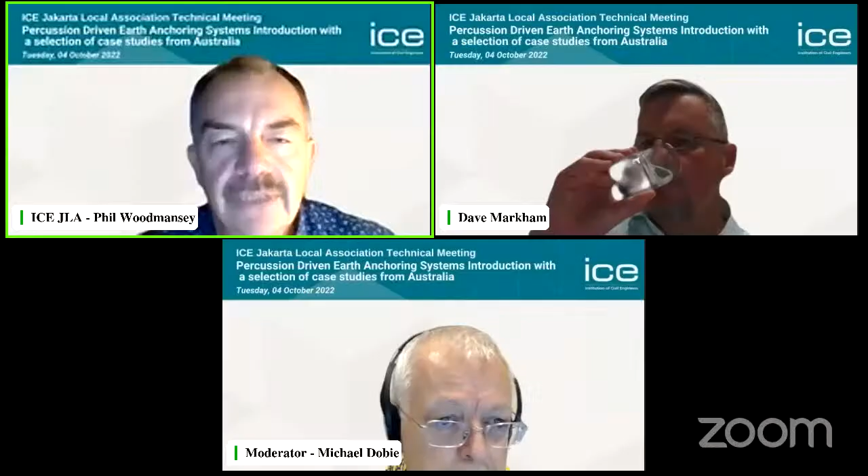Okay, thanks, Malvin. Apologies everyone if you can hear the sirens. I am right in the middle of the city and there's something going on outside, but I hope you can hear me okay. Welcome everyone to our ICE Jakarta Local Association technical presentation. For those of you who know, we try to run good quality presentations once a month or thereabouts. Normally we're live at our home location at the Eastern Promise in Kemang, but tonight we're completely remote again because our speaker, Dave Markham, is based in Australia, where it's getting quite late there.

And so thank you, Dave, for taking the time to talk to us. I think on that note, I'll allow Mike to introduce you and look forward to listening to your presentation.

Hey, thanks very much, Phil. So I have the pleasure this evening of introducing our speaker and the topic which he's going to speak about. So Dave Markham is a civil engineer who started his career in the UK, but he moved out in this direction, I think, quite a few years ago, and lives in Australia these days. And he's worked in a number of areas there.

But I first met Dave when he was working with a geosynthetics company associated with the work that we do there. And in fact, it's quite nice to actually welcome Dave back to Indonesia this evening, but unfortunately in only a virtual way, Dave. It's a shame you're not actually here in the Eastern Promise pub, but never mind.

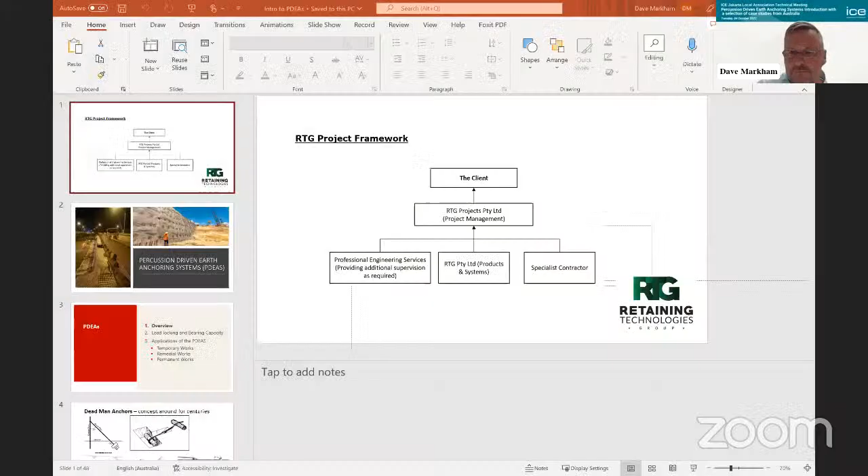So I'm just going to share my screen now, hopefully. Yep, it's coming through nicely, Dave.

Fantastic. Okay, just a very brief introduction to the company that I work for and run here in Australia. It's quite a young company called Retaining Technologies Group, and it delivers turnkey type solutions, or total solutions. What that does is bring together all the engineering, the products and systems needed to solve embankment stability and retaining wall problems, and also the installation. Equally important is the supervision and management of these projects, to make sure they're built to a high quality, built safely, and meet a client's budget expectations.

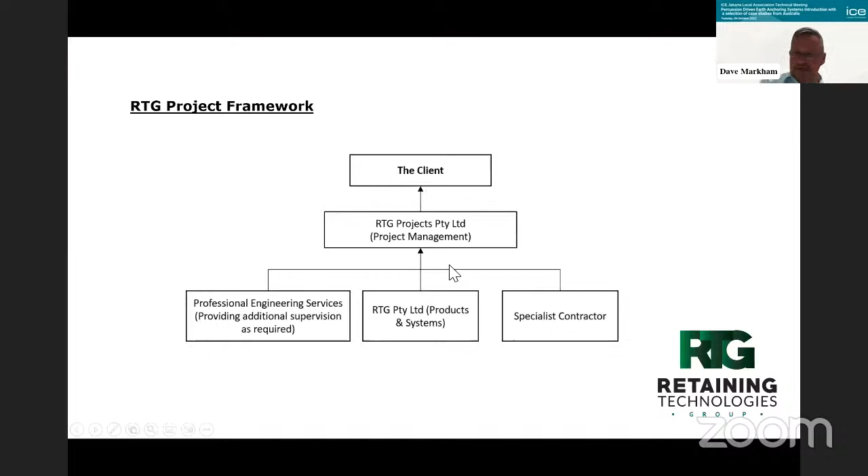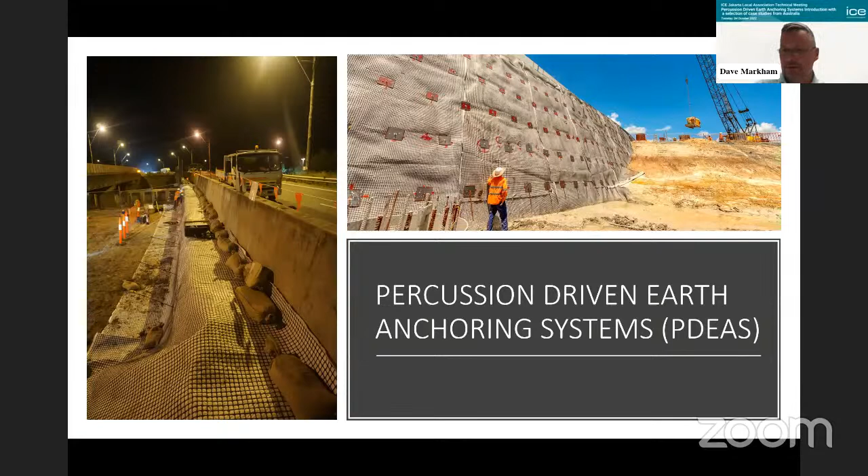So let's dive straight into the main topic of discussion tonight, which is the percussion-driven earth anchoring system. There are a couple of photos on this slide, both temporary works projects using this type of system. The one above the text is a relatively new project carried out at a place called Deception Bay in Queensland. It's a temporary works application - you can see it's a very steep slope, up to I think 9 meters in height. It's stabilizing that embankment using this anchor system to allow a new bridge abutment to be built in front of it.

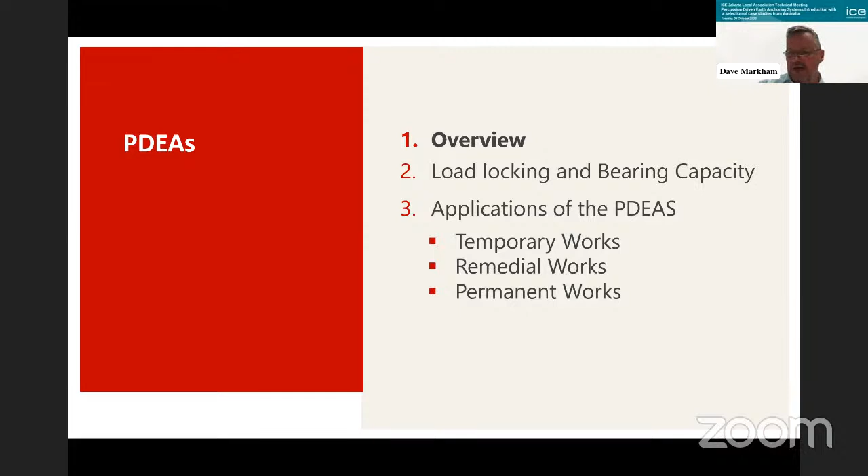Right, so I'm going to give you an overview of this system and where it's come from. I also want to talk about how the system functions, how it works from a load locking and bearing capacity application. Then we'll go on to talk about applications and where this system's being used in temporary works, remedial measure works, and finally permanent work solutions.

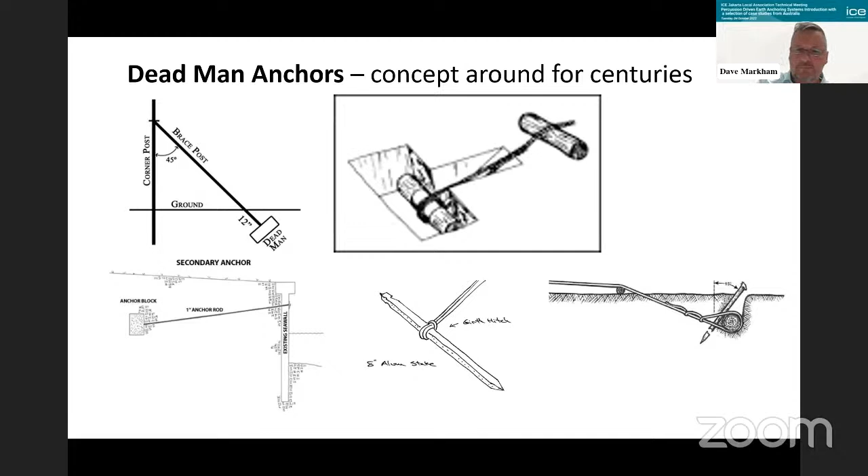So I'm referring to this as a percussion-driven earth anchor system. Sometimes it can be referred to as a mechanical deadman anchor system. Let's understand a little bit about what deadman anchors are - there's certainly nothing new, they've been around for centuries. Romans and the Egyptians used this concept of burying something in the soil to provide an anchor, to be able to put a tension force on it. Where the percussion-driven earth anchor system differs - and it's been around commercially probably 30, if not 40 years - is that you drive it into the soil, to whatever depth you need, then tension it such that the anchor flips in the soil and becomes a dead man.

Okay, so it's a percussion-driven earth anchor. I should mention that word 'earth', because it is very much an earth anchor solution - it's not a rock bolt. You've got to use this system in displaceable soils, material that you can actually displace. So it's not a rock anchor - this is not the right solution for hard sandstones or maybe granites. This is very much an earth anchor option.

As a system, it can be rapidly deployed and is corrosion resistant. Installing it, you can use traditional or conventional portable equipment, from the smallest equipment like a manual sledgehammer, knocking a drive rod in, to maybe a small jackhammer to put smaller anchors in, to the other end of the spectrum where you use a small excavator, typically 5 to 8 tons in capacity, with a mounted percussion breaker that drives the anchor into the soil.

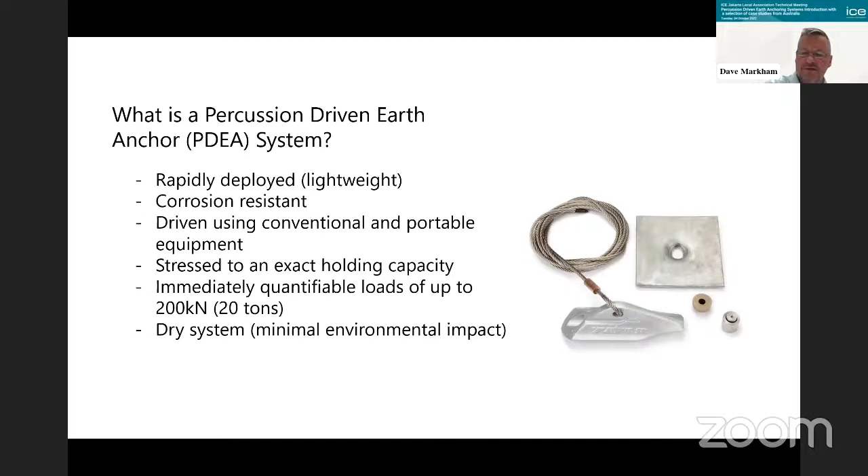So we refer to this solution as a system, and we've got to look at the whole thing as a system. When you're designing and detailing it, don't just think of the anchor head, think of all the other components. There's very much 5 components to the whole anchor system: you've got your head, then some sort of lower termination that connects the wire, tendon, or maybe a rigid rod to the anchor head, and then at the top here, your top accessory, your top termination, could be a load plate, could be a wedge grip, or maybe a nut of sorts. But always think of this as a system.

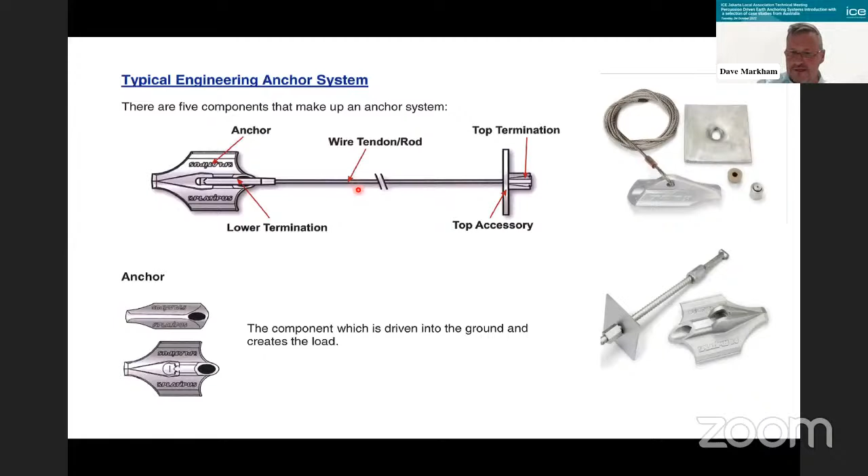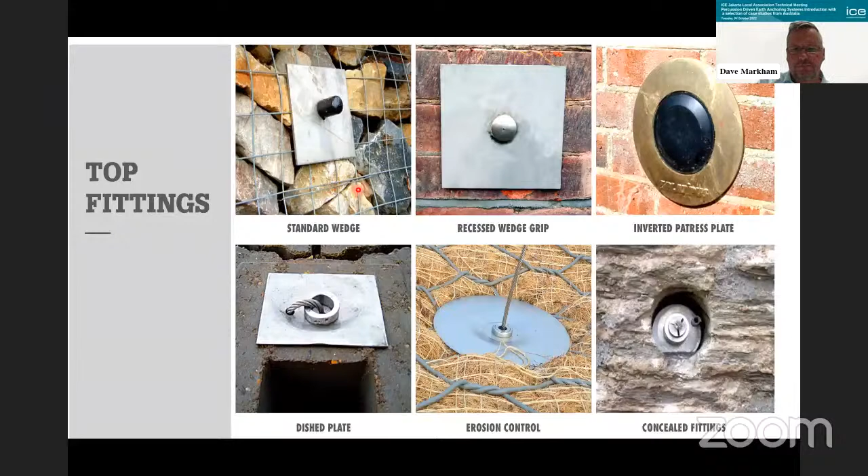These are just a few photos. I was quite fortunate just before COVID, a couple of years ago, to go to Switzerland and walk some sites with a contractor there that does an extensive amount of this type of solution using this type of system for embankment slope stability. The ground, if you've ever been to Switzerland, is very undulating, and the ground conditions are pretty ideal for using and deploying this type of system. But I picked up quite a lot of information on how they go about their business and their adopting of their type of solutions with it.

And I really quite liked, in this top left-hand corner here, the waling plate arrangement. This is very much for a temporary embankment here, but they come up with these channel sections, which I thought were quite clever to spread the load out over the slope. You can see the mesh in the face there and an erosion mat as well. Also they're very clever with their quality assurance - you can see those little tags on there. Actually, every anchor they install is numbered, and then they relate that back to a quality assurance program or sheet to give confidence to all stakeholders that these anchors are being put in correctly to whatever depth and whatever load that they need.

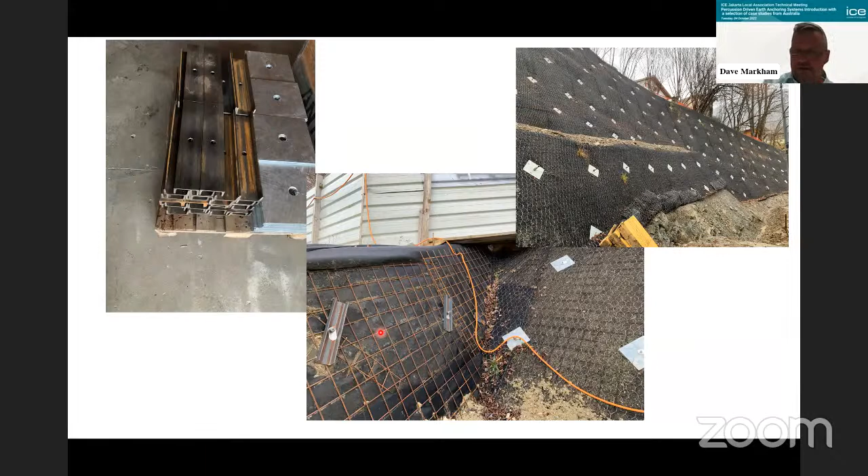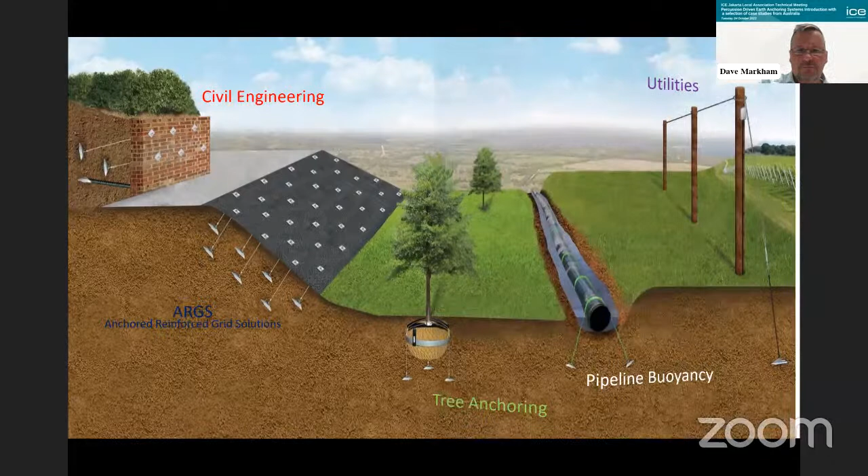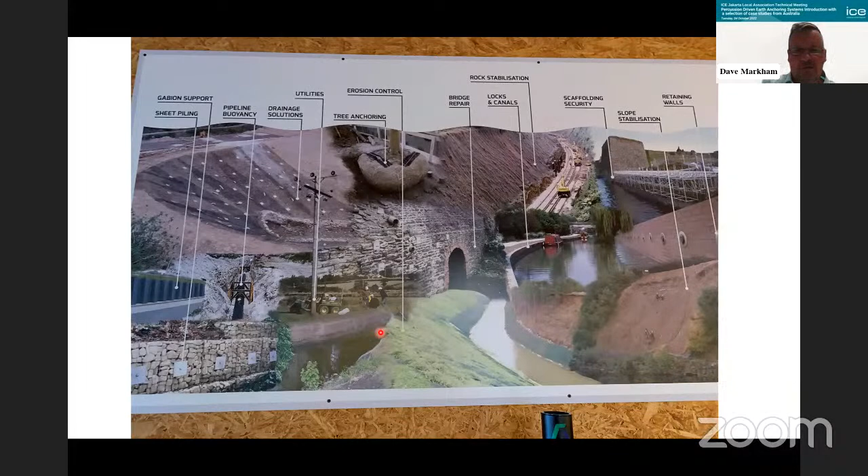Just another similar drawing or image showing the endless applications of where you can potentially use this to solve problems. As we come towards the end of the presentation, you'll get to see more of those applications where you can use this type of solution to hold down things and provide embankment stability.

First is the bearing capacity of the ground, and certainly higher friction soils like sands and gravels will arguably give better loads.

One of the other variables, pretty obviously, is the anchor head size. I'm sure one of your questions could well be, what sort of size anchor heads do we have? Probably the smallest ones might be something like 75 mil, 3 inches in old money, up to maybe half a meter, if not a meter in size - that's 1,000 millimeters. So we can have some pretty big anchor heads, and the limit is on whether you can actually get them into the ground with the equipment you've got.

With friction soils, there's another variable that gives you the load on the anchor, and that's the overburden depth to the anchor head. That's only with friction soils, but it will have a bearing on what sort of load you get out of your system. Then, of course, there's the strength of the tendon and bar.

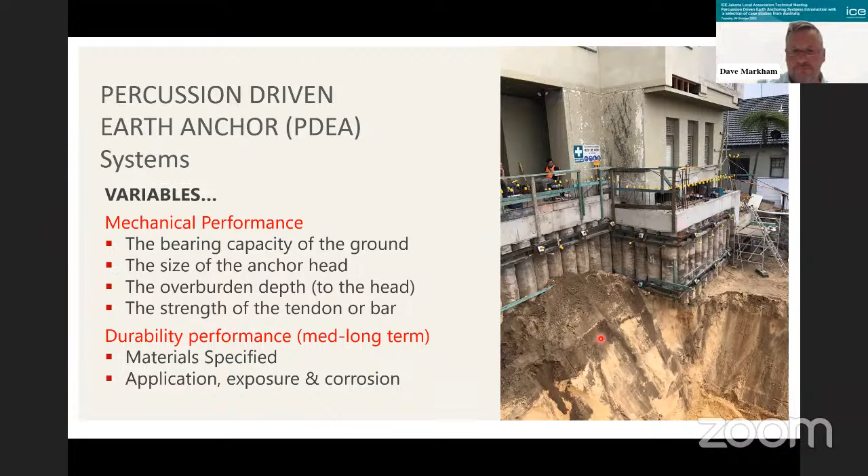So let's look at how this system works in bearing stress failure. Here we have, for example, friction soils - sands and gravels. When you tension the anchor, you get a frustrum of soil resistance forming at the back. Designing with it is a bit like designing a footing, but turned upside down - you're pulling against the soil rather than pushing against it. This is where you can use Terzaghi in your design analysis, and you can see with friction soils you get quite a wide wedge or frustrum cone of soil resistance.

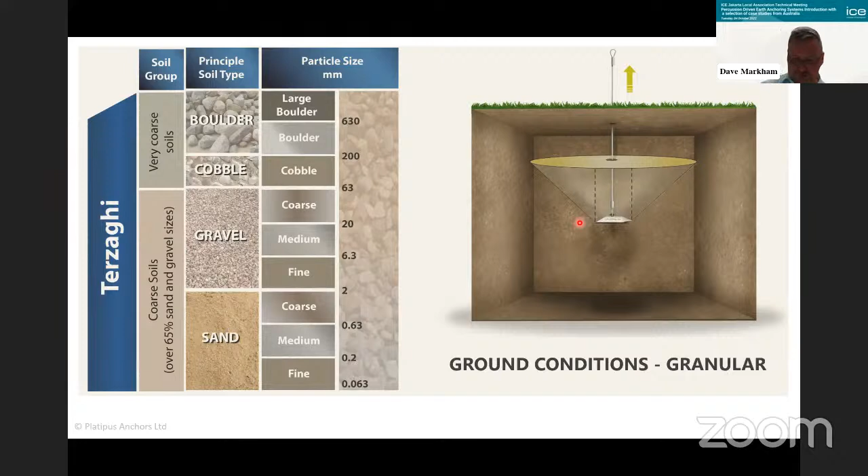If we look at cohesive soils now, because you've got weaker soils here, we end up with a much more slender frustrum cone of resistance. Quite often it doesn't mean you can't use this system in cohesive soils, but you may have to choose a larger head to give you the working load you need, whereas a smaller head in friction soils will do the job compared to cohesive soils.

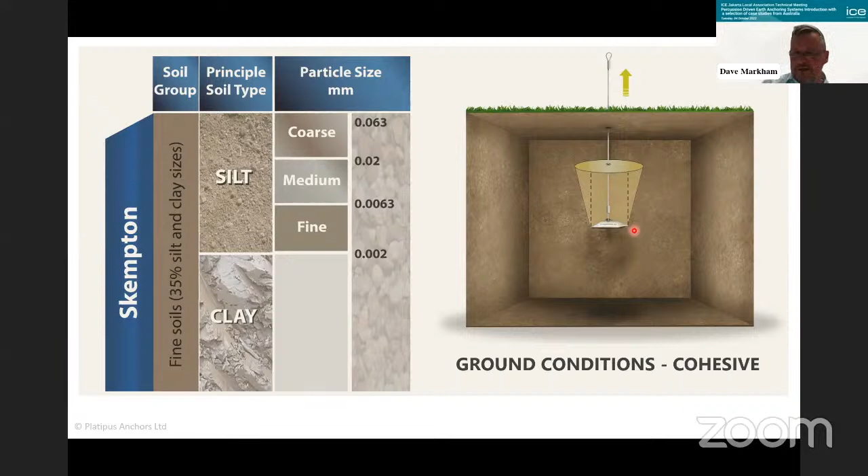What is really good with not just anchor installation, but also soil nails is to, wherever you can, do a trial. You know yourselves as engineers on jobs where you may have the best geotech or most extensive geotech investigation carried out - numerous boreholes, site trial pits, possibly DCPs - but quite often you'll go and drive your anchor or soil nail, and the ground is unforeseen. You experience something completely different to what was actually in the trial pits or boreholes. So it's ideal if you can actually do a trial on a project. It's not always possible, but if you can, it is ideal.

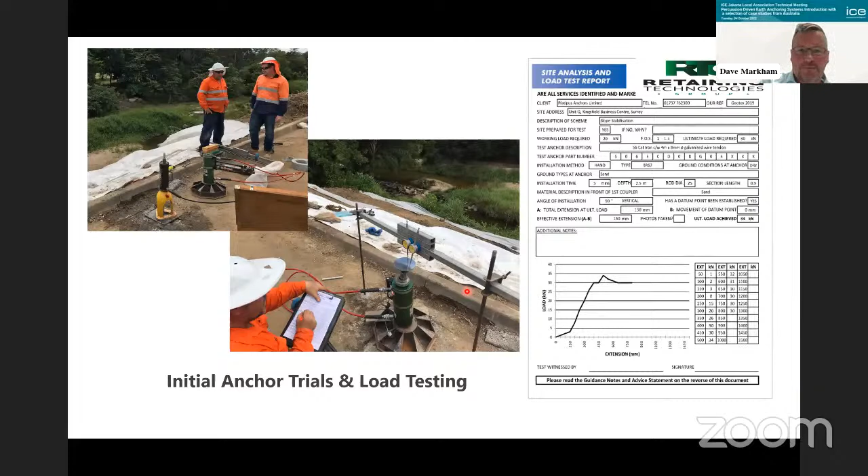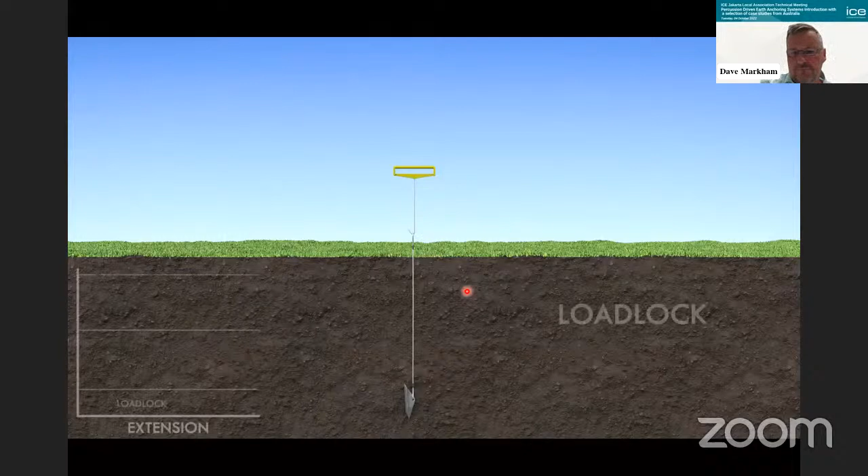Let's have a look and see how now. So if you can imagine this anchor is now installed into the soil. Now let's tension it. I'm just going to let this run through.

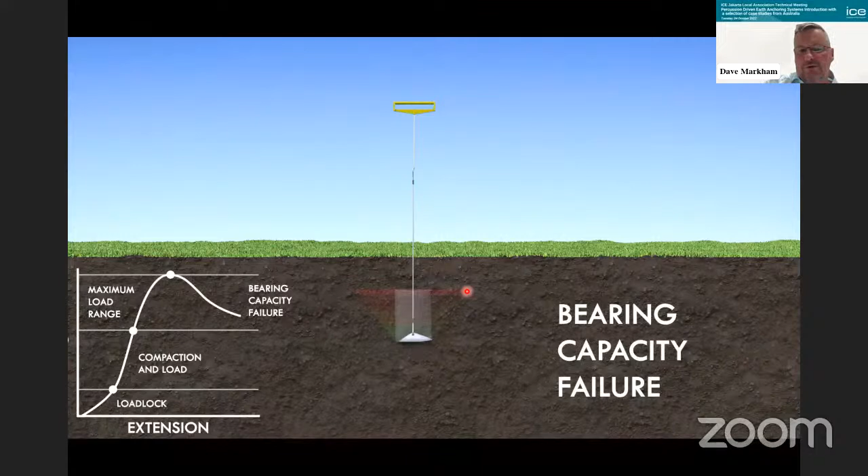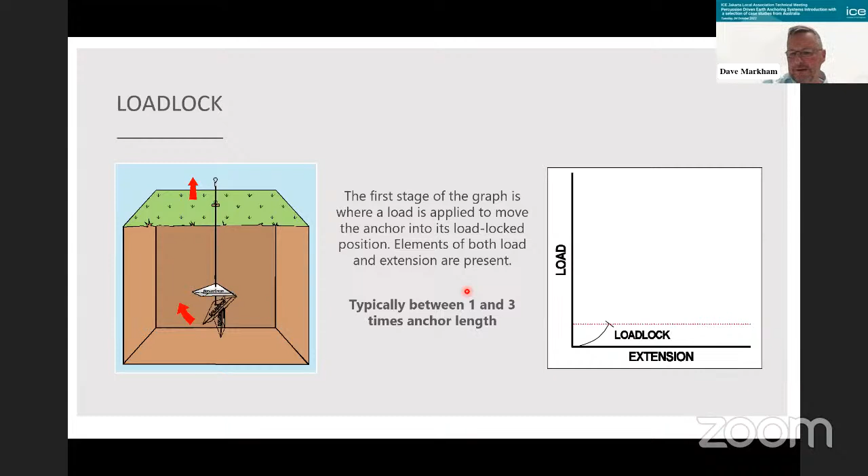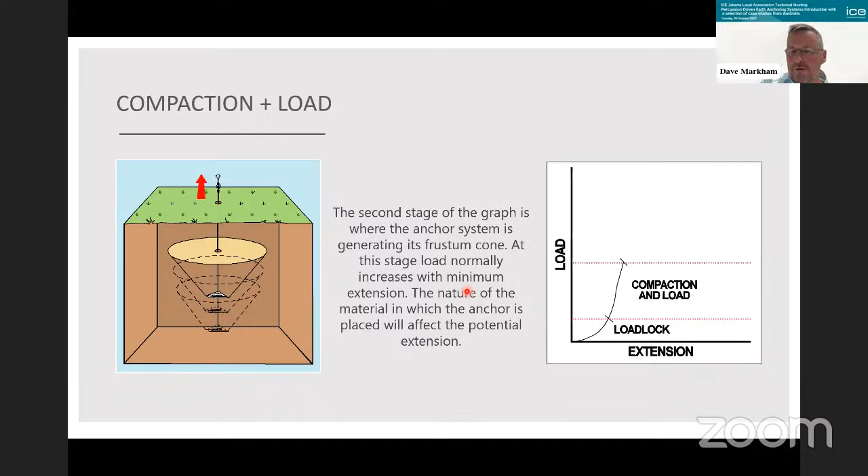So now what I want to do is analyze each of these areas: loadlock, compaction, then reaching your bearing capacity failure. If we have a look at the first, once you've driven the anchor into the soil, you can see this is a graph that shows load versus extension. When you first tension the anchor, you get quite a bit of extension, not very much load - that's when the anchor is simply turning in the soil to become a dead man. Then it starts to compact and take up load. You can see you're starting to reduce the extension, but getting much more load. And then ultimately, if we pull it so hard and reach the ultimate load, we get bearing capacity failure.

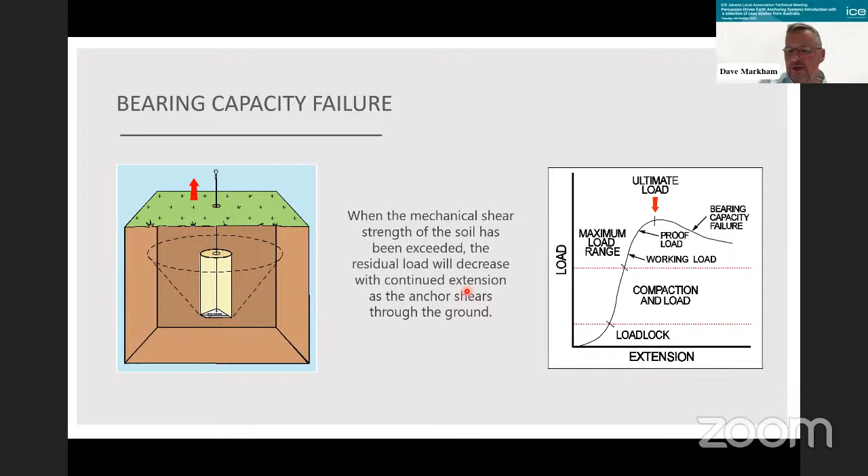Now, as engineers on a job, we will ask of the system a design load or working load. So what you do on every anchor you install with this percussion-driven earth anchor is you proof load them - every anchor gets proof loaded. What that proof load tells you is it gives you confidence you've reached your working or design load, but you're below your ultimate load. So you're not shearing the soil, and effectively the system becomes a bit redundant. The proof load is generally 10 to 20% above the working load, but every anchor gets that verification.

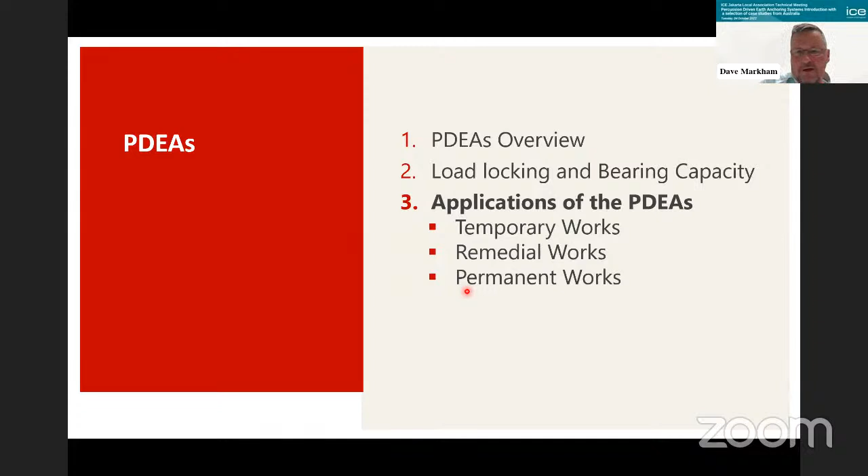Right, let's start to talk about some projects if we can, and go straight into a temporary works project. But before I do, I want to show you this little animation - hopefully it'll work for a cut face.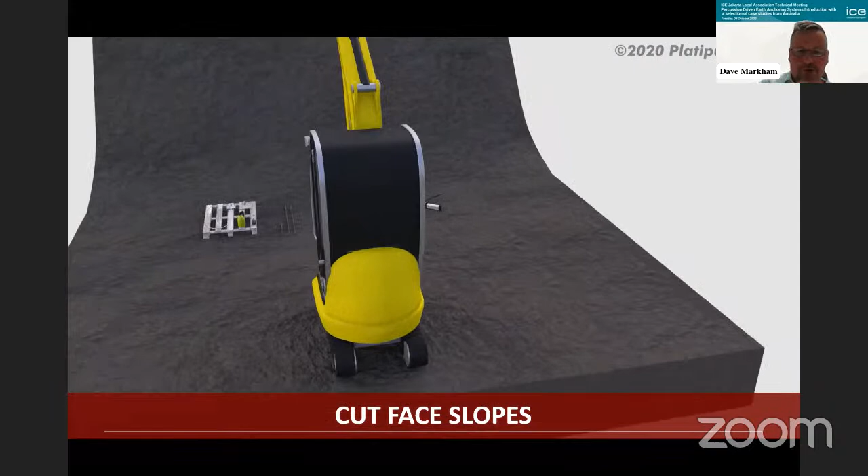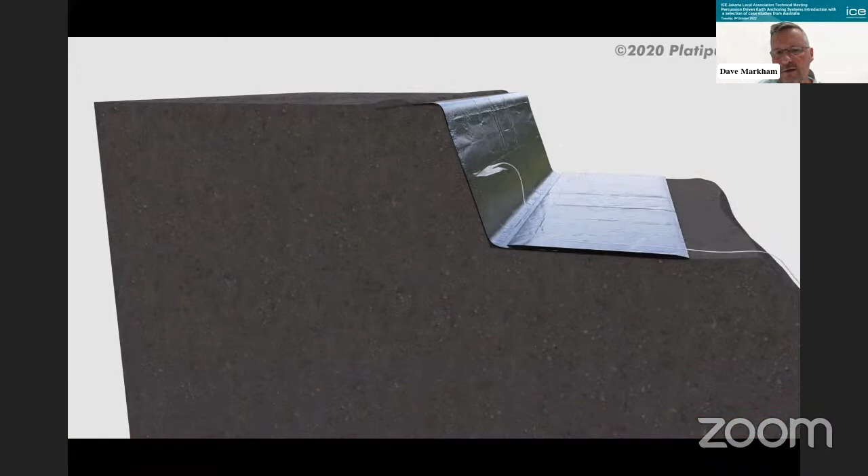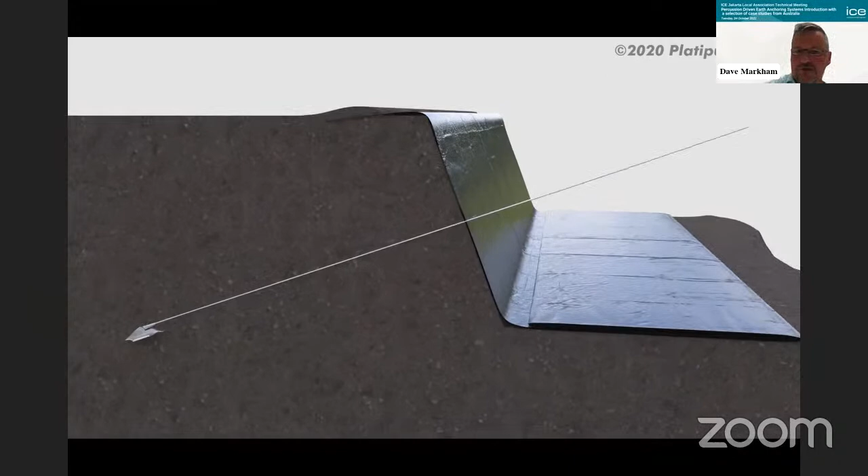In Australia here, and maybe you do in Indonesia as well, from a safety point of view, if we're doing a temporary batter, quite often we'll do what we call a top-down construction. So we'll only excavate maybe a meter or a meter and a half, possibly 2 meters, and we drive the anchors into position. You can see now the excavator - as I said earlier, a typical 5-8 ton excavator - driving the anchors into whatever depth you need. We're now removing those drive rods, which are temporary, to get the anchor into position. We've already placed an erosion mat on the face because it's a steep face, maybe 60 or 70 degrees.

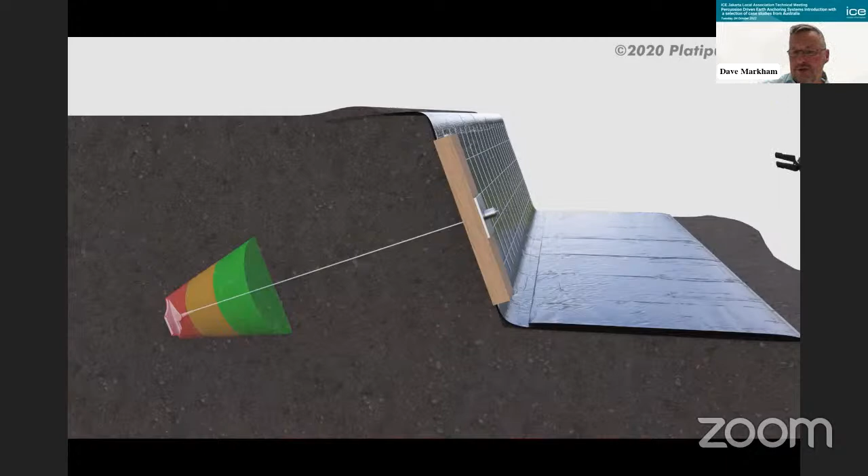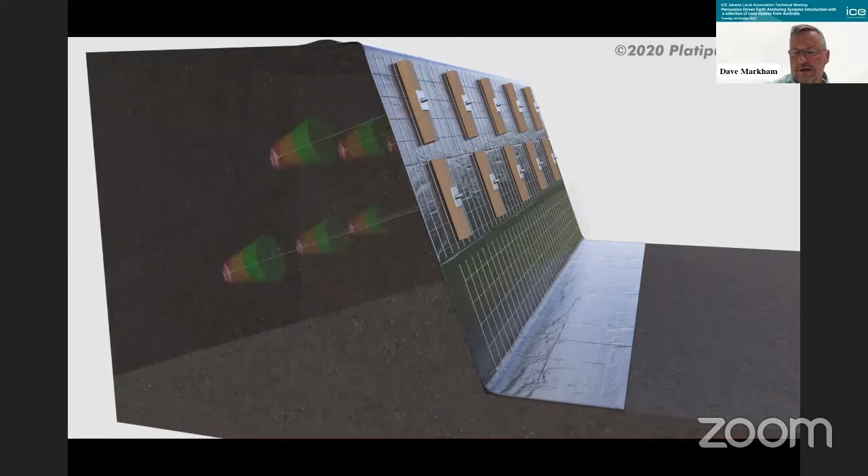We're loading those anchors up, stressing them, so they're now reaching their proof loads. Quite often in this application, the anchors are active and not passive, so they're under stress. So we carry on and do the first layer, and once that's stabilized, we then excavate out another 1.5 to 2 meters, place the anchors in, and so on. That's quite a safe way of actually carrying out a temporary anchor solution with this type of system.

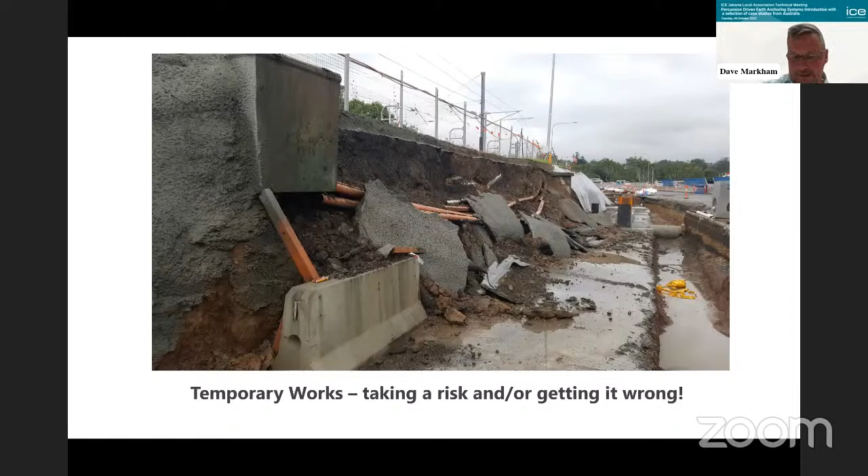So the first job project I want to talk to you about today is called the M4 West Connex project. The temporary works actually was carried out over probably a couple of years. From an overview perspective, some of the key stakeholders on this project, this was in Sydney by the way, was Leighton's, the contractor, which they're now referred to as CPB contractors here in Australia. They're a tier 1 contractor. And we've got reputable designers of Coffey and Smec involved as the consultants.

The project, in essence, involves widening of the M4 motorway in Sydney, which is a very busy motorway near Sydney Airport, some 7.5 kilometres in length. And the works for the temporary works involved installing some 1,500 percussion-driven earth anchor systems, design loads of 6 tons, 60 kilonewtons, to stabilize a very steep 60-degree embankment up to maybe heights of 9 meters.

So let me just highlight a few key features of using this system. What I'm hoping you'll find from these short case studies is there's a common thread coming out, and that's the constructability - how quick you can get this anchor system in and get it loaded. So there's a big constructible and buildability aspect to this system if it can solve your problem. You mustn't always look at just the supply cost of materials. You've got to look at the whole job, the total cost, the resources needed to put them in and how quickly you can get them in.

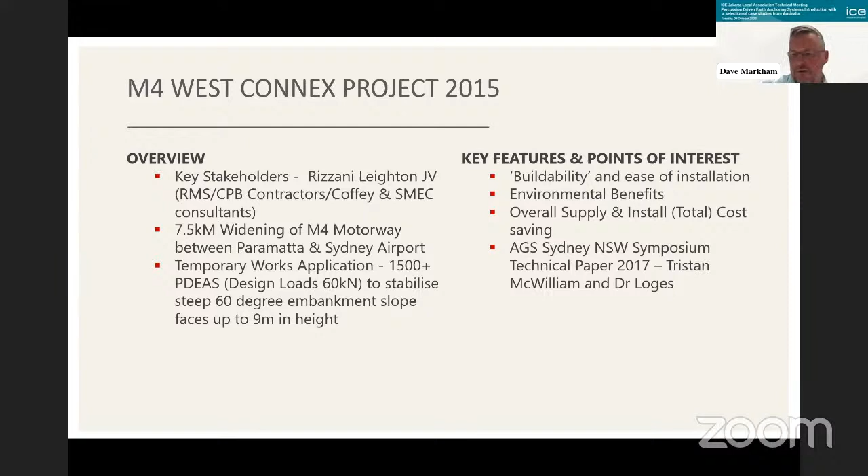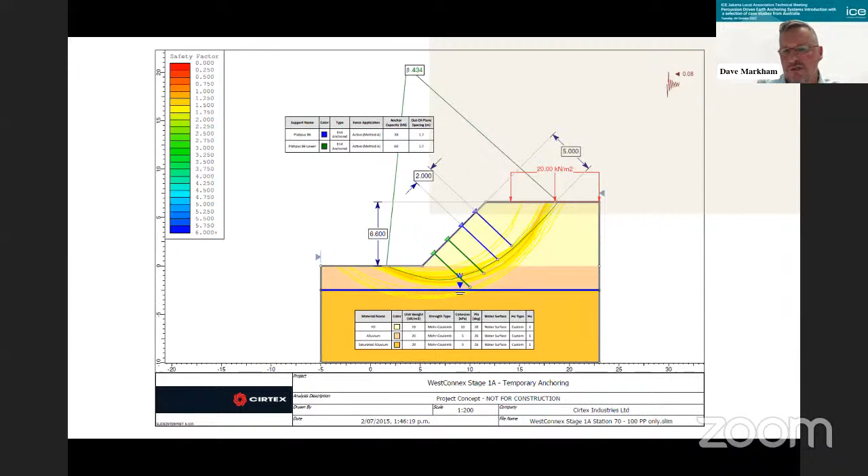So this is just some preliminary analysis carried out using, I think it was Slide, modeling these anchor systems. From this, you can see it's a steep batter. This particular section is up to maybe nearly 7 meters. The anchors are spaced on the face at 2 meters by 1.5 meters. And you can see that quite high surcharge loading from the M4 at the top there.

The worst thing that can happen is you get a heavy rainfall event, and if you've not got that protected, you can get into all sorts of problems with the face being washed away and erosion of the anchoring, where the anchors then start to lose their integrity. So that erosion protection of the steep face in the short term is very important.

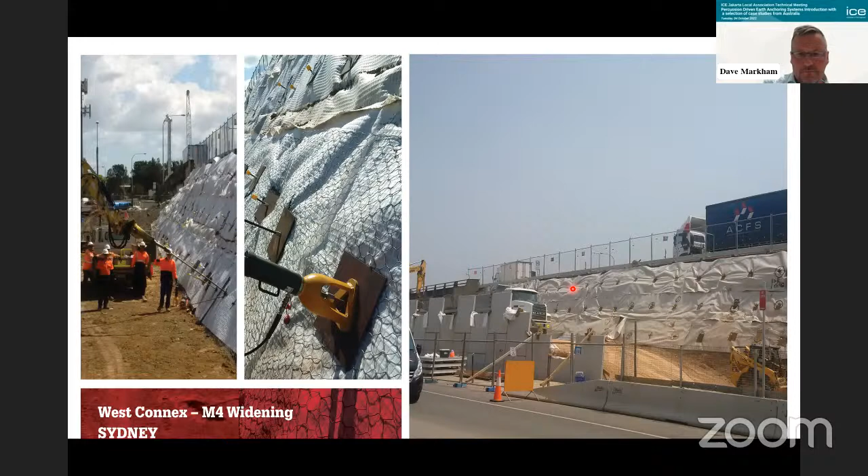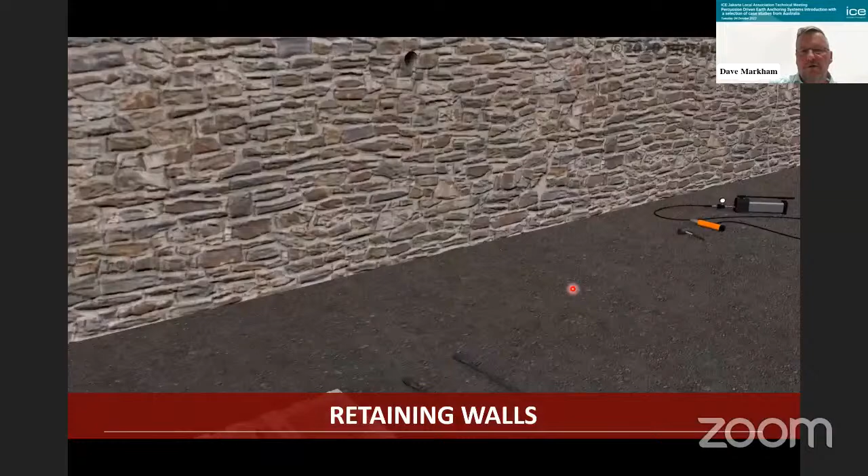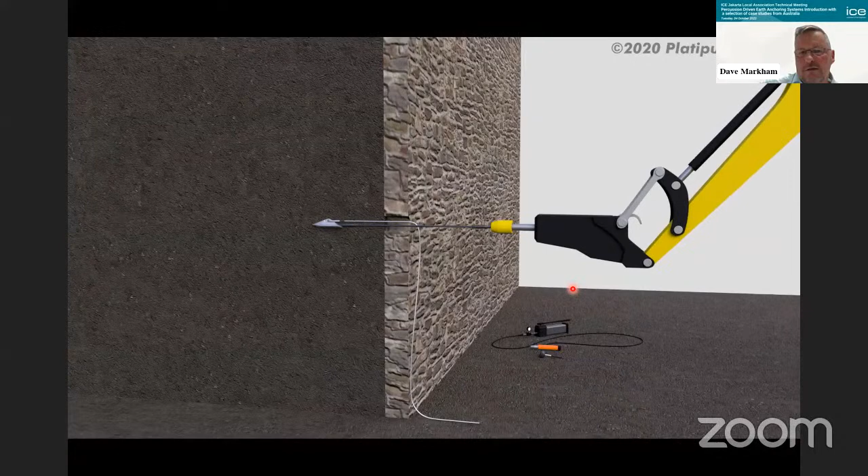Let's move on now to a remedial works application using the percussion-driven earth anchor. I've got another little animation here for you. So here we've got an existing wall, and we've cored a hole through that wall. We're driving the anchors in a similar way as what we did previously with the temporary works, using an excavator and drive rods.

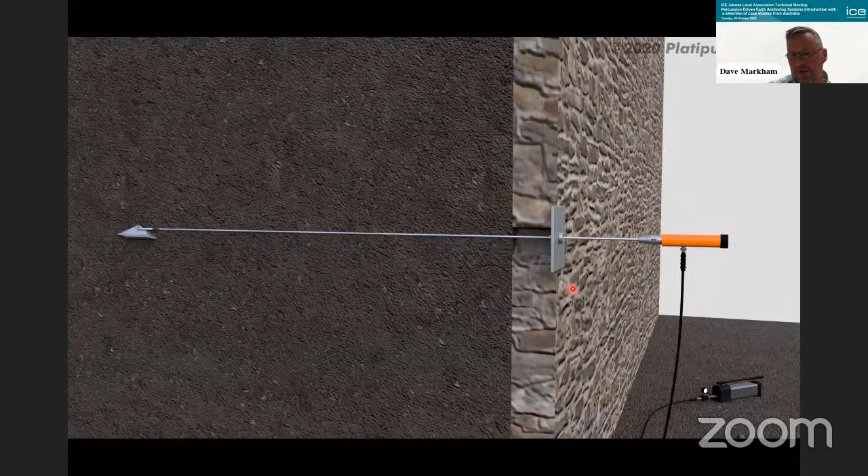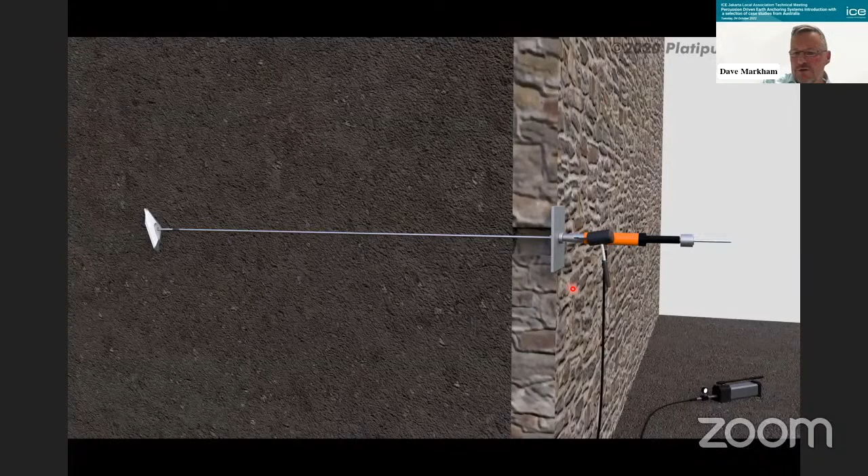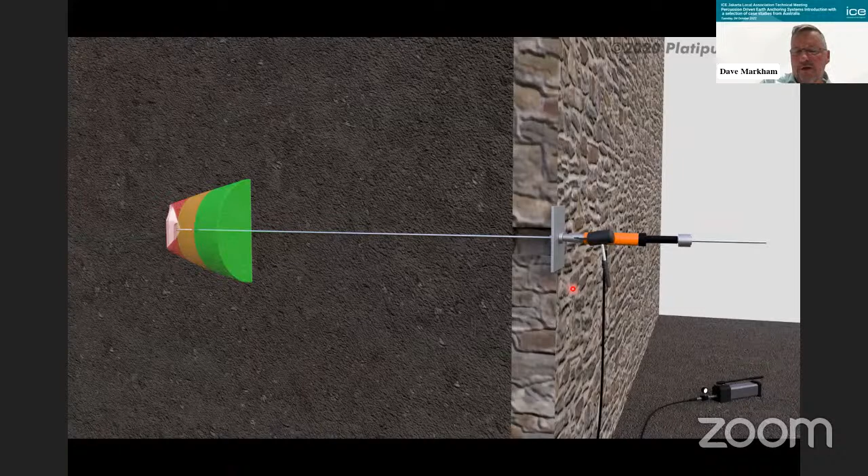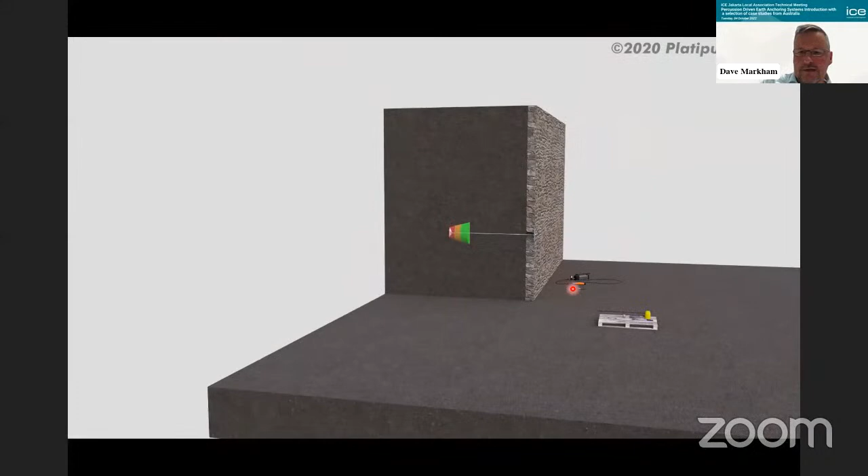Now, this remedial measure is not to push walls back into position. It is very much there to extend the life of that wall. Quite often you come across a wall that's actually moving a little bit or is being seen to fail. So it's extending the life. I know from my experience in the UK, we've got a lot of old heritage walls that are protected and they don't want to take them down, so this can be an ideal solution to keeping the wall and extending its life. And certainly here in Australia, retaining walls that come to the end of their life after maybe 40 to 50 years, these are measures that could be implemented to extend that life.

So I'm going to give you an overview of a small case study for remedial works here in Queensland back in 2015. This was for Queensland Rail.

A small contractor carried out the works, a company called Australian Marine and Civil. Just for your interest, this rail line is the oldest rail track in Queensland. The platform itself was built in the 1960s, so the concrete in the platform is reasonably hard, having had 60-odd years to harden and mature. The works involved a permanent works application, installing 16 of these percussion-driven earth anchors with typical design loads of up to 3 tons, or 30 kilonewtons.

Now, the biggest advantage of adopting this system on this particular job was that because it was a rail job, we had a very short possession window of 12 hours to get in, do the works and get out. So you can imagine if you'd adopted a drilled and grouted solution, you'd have had to revisit the job at another possession window to load test. Whereas on this job, because you can instantly load these anchors, we could get load straight away and move on and complete the job.

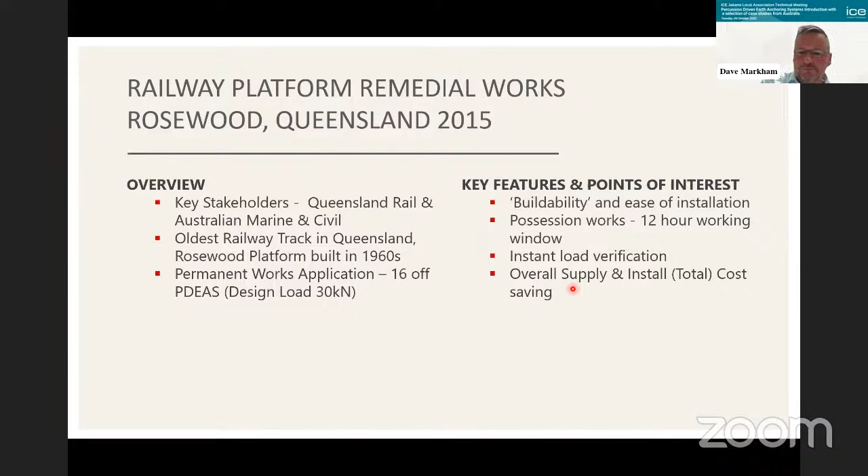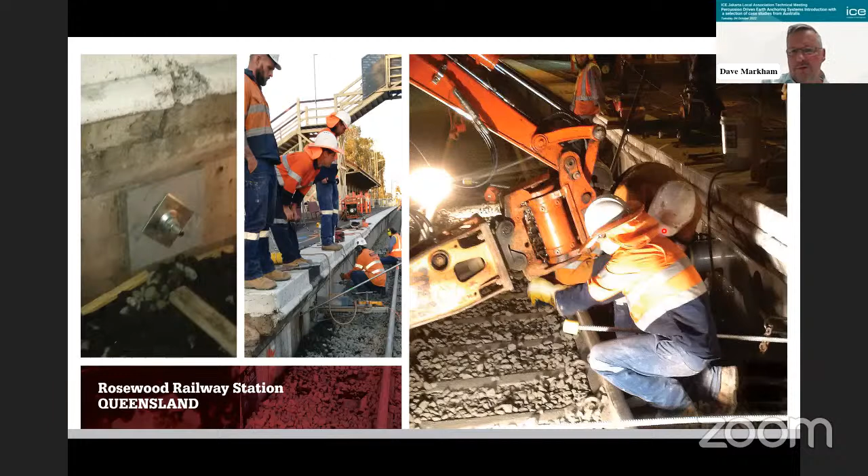Okay, now I'm going to share a couple of permanent slope stability applications using these anchors in Australia. Before I do, Mike mentioned heavy rainfall events, and I have to say on the eastern seaboard of Australia, certainly in Queensland and New South Wales, and northern New South Wales, we've had some significant heavy rainfall events this year, particularly at the beginning of the year, February and March, where we had a lot of intense rainfall which caused all sorts of slope stability and retaining wall problems.

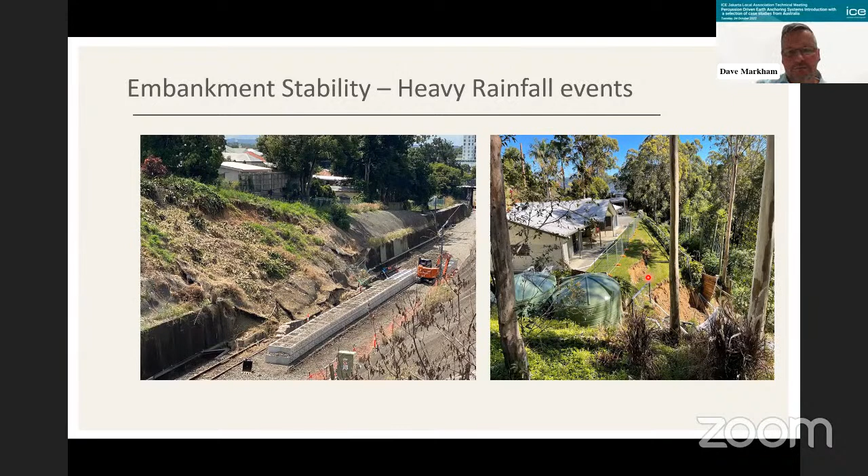The first project I'm going to introduce you to was a project called Mount Cotton in Queensland that was constructed in 2018. It's a main roads project. The consultant was Cardno, and a good local contractor called Doval Constructions carried out the installation.

It involves stabilizing a 150-meter length of cut slope, already cut. Mike mentioned various retaining wall options, either taking all the material out or building out with a reinforced soil or gravity mass. In this case, we've already got this 50-degree slope. After the event, the engineer realized it needed stability measures, so we're putting anchors or nails in there to stabilize it, up to 4 meters in height at a 50-degree slope angle.

The works involved installing some 200 percussion-driven earth anchors, with typical design or working loads between 3 to maybe 6 tons, so around 60 kilonewtons.

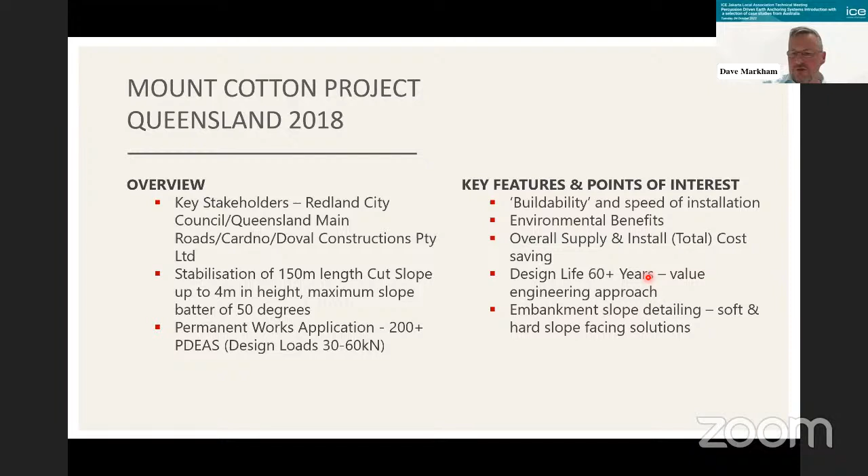The thing I want to highlight here is this was very much a value engineering approach. The engineer and various stakeholders were quite happy to detail a solution with a design life of 60 plus years. Quite often in Australia, particularly for structures, we're looking for a 100-year design life, but on this occasion we went with a soft engineering and hard engineering facing solution, with a 60 plus year design life expectancy.

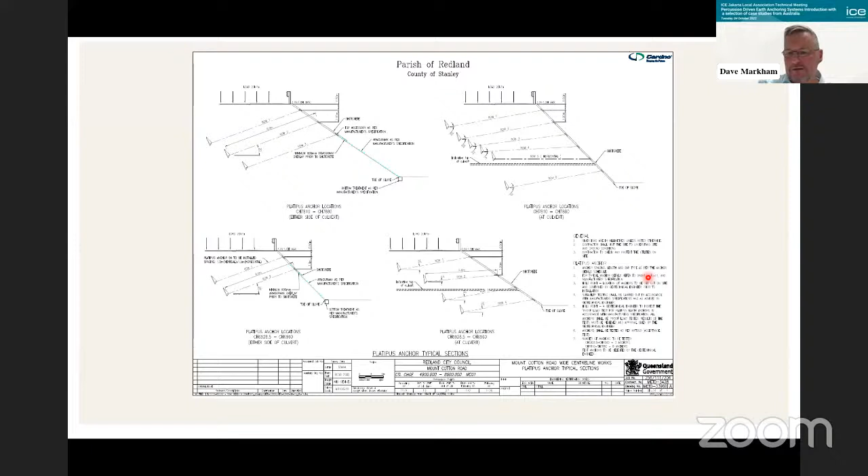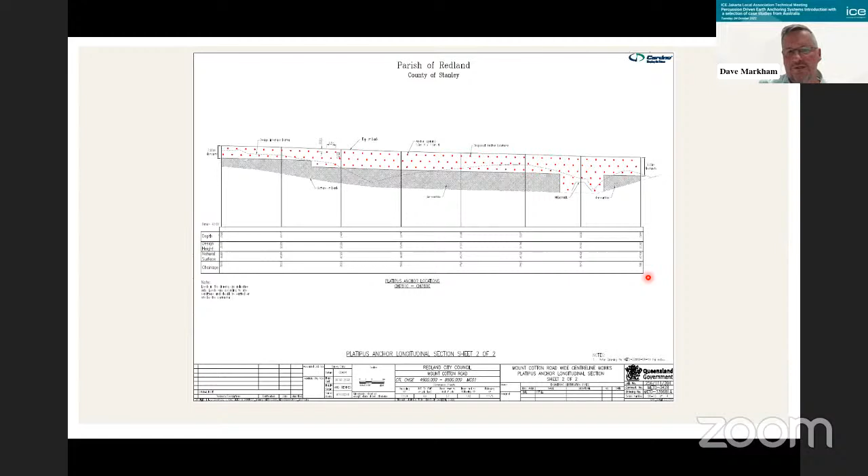He came up with a very nice method of a small paving slab, not very big, drilled a hole through it, and that acts as a spacer and something to spread the load on the slope for the mesh, before the shotcreting happens afterwards. It's quite a clever way of detailing the spacing of the mesh away from the slope.

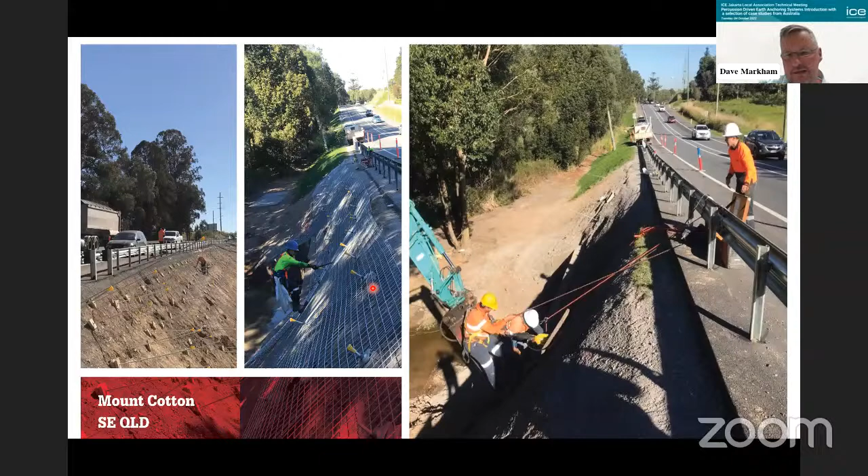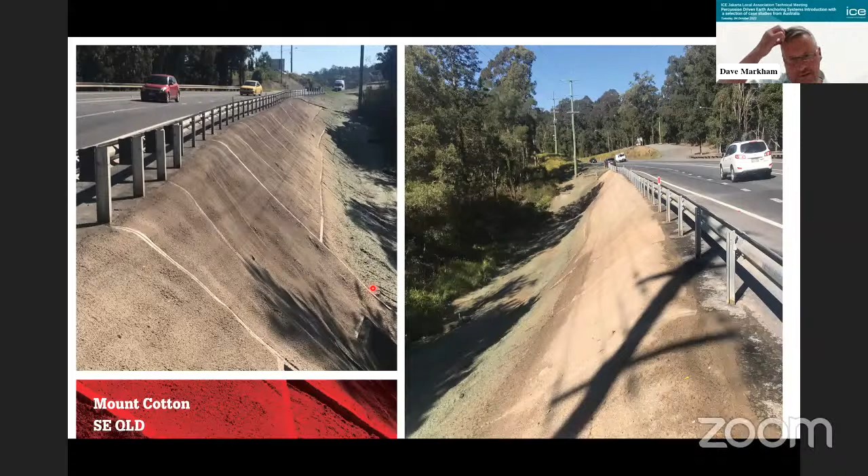Another permanent works project in Queensland, this one up at a place called Noosa, on the Sunshine Coast. Key stakeholders on this job were the council, the local Noosa Shire Council, and a consultant called Geotechnical. We're stabilizing a 30-meter length of existing slope, up to 6 meters in height, about 50-degree angle of repose.

This time we're not going that deep with the anchors, we're addressing shallow slips. So these anchors, 70 plus of them, have relatively small loads, 1.5 tons, 15 kilonewtons, and we're just driving them maybe 1.5 to 2 meters into the embankment to deal with shallow slips and to hold the erosion mat into position. Very much a value engineering approach again, with the 60-year design life.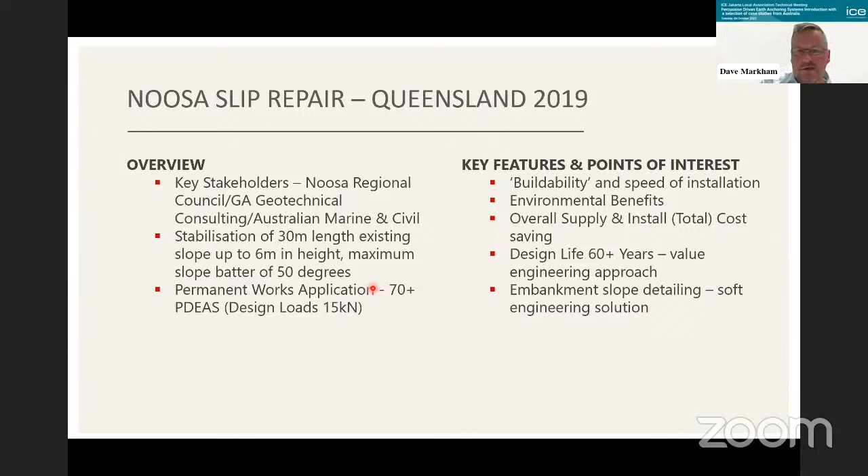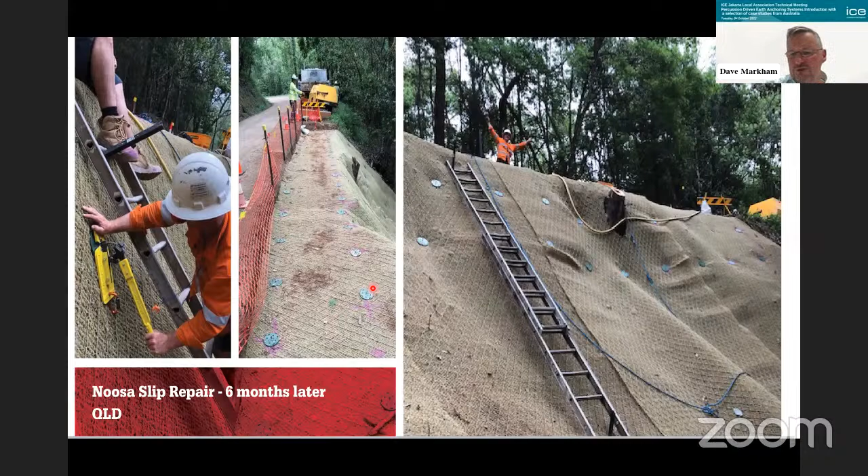There's some images of the erosion matting being placed and the anchors being tensioned up. Remember that we're only addressing shallow slips here, also using a decent anchoring system to hold that erosion mat in place. There's erosion control, and also strength and tension in that mat to spread loads or stress loads between the anchor heads.

This was a difficult to access job, and it was nice to revisit it maybe 6 months afterwards. Little drone shots there show the slope starting to vegetate, and that vegetation is a very important part of helping stabilize that very steep embankment with the anchors. So the encouragement of vegetation is very important.

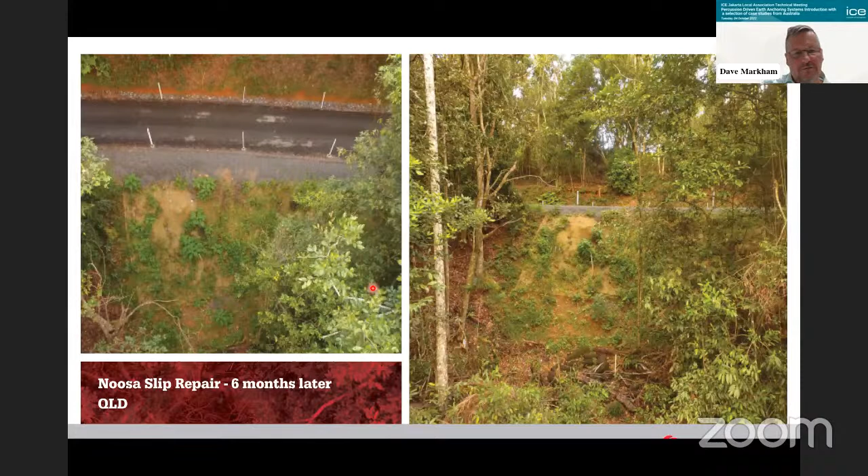I'm going to wind up now with just some one-page photos of typical jobs I've been involved in, not full case studies, but just to give you an appreciation of the sheer number of applications where you can potentially use this type of anchoring system.

This first one is in far north Queensland here in Australia, very prone to cyclone weather. Actually this was a temporary bridge - this is the new temporary bridge being constructed, but the first temporary bridge was washed away in a cyclone.

Very remote area, some 30 or 40 kilometers from the nearest town. So it was very hard to get concrete, very hard to mobilize complex piling rigs, etc.

The engineer came up with the idea of holding this bridge down, the abutments down, using raked percussion-driven earth anchors, quite large loads, I think around 10 tons on this one. Those anchors were raked to deal with various uplift and horizontal forces that a very fast-flowing river cyclone event can put on that bridge. But the remoteness of the job and the idea that these anchors went in very quickly was very much appreciated by the contractor on that project.

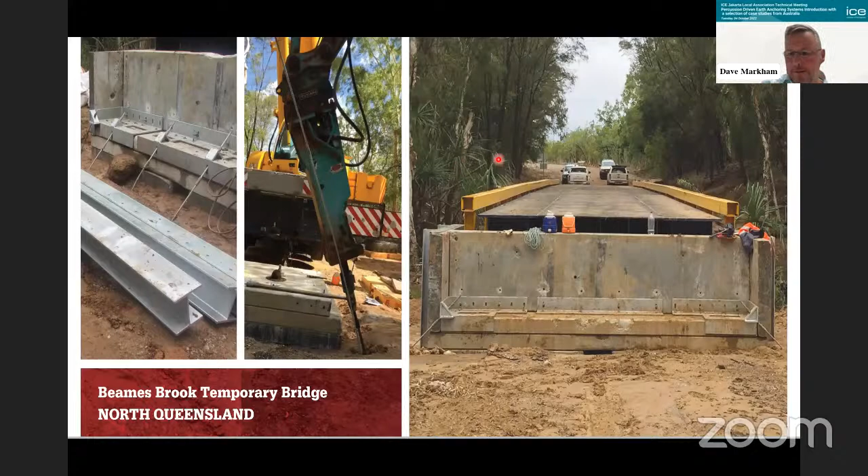This was a job down in a place called Newcastle in New South Wales. The engineer on this was AECOM.

It's a shared access retaining wall across a railway line again, and it uses anchor systems. The engineer wanted some additional holding back force, and I can honestly say I was on site for this job. All 7 anchor systems were installed in the morning, and load quantified. That allowed the contractor to go and do the backfill in the afternoon. So a very quick system to install and then carry on with the works. I actually quite like this top termination plate that the engineers designed to deal with the loadings.

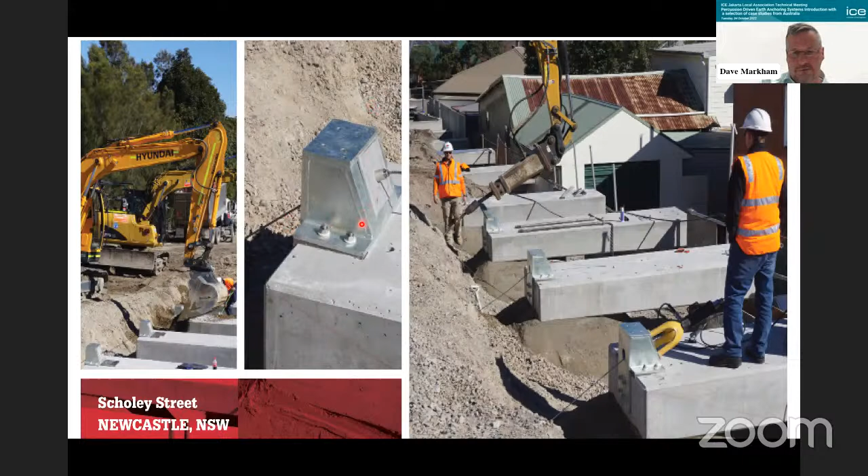Coming into some slightly different applications now, very much holding down. I believe this was maybe one of the first, if not the first, floating solar panel farms in Australia. I think maybe in Indonesia this may be taking off, and you're looking at solar panel farms on water and certainly on dry land. In this case, we've installed percussion-driven earth anchors around the outside of this pond.

It's actually a horrible sewage treatment plant, so it wasn't very much fun putting the anchors in the water here, which we had to do as well. There were anchors put in the water and also all the way around the outside to provide a holding down method for wind and also flooding events. You can just see the anchors being loaded here with a simple load cell.

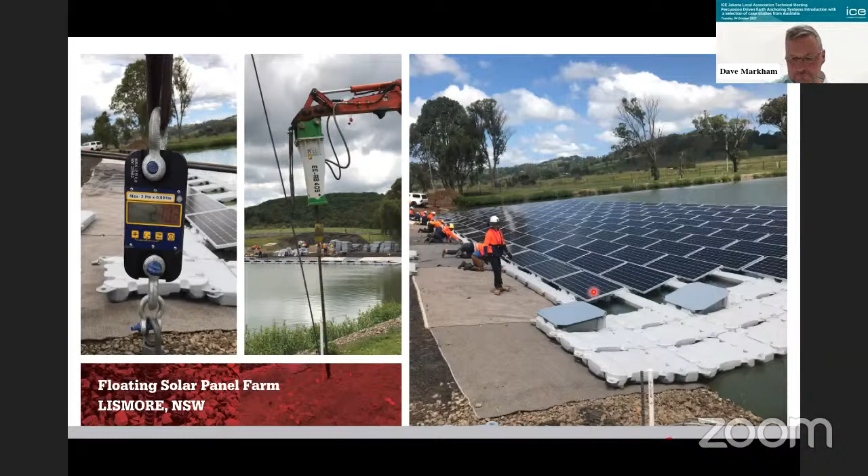Keeping on the renewable energy theme here, this is a dryland situation now. Again, far north Queensland, where we do experience some quite extreme weather, certainly from winds and rainfall events. But what we had up here is a situation where, when this solar panel farm was installed, the contractor couldn't actually get the piles deep enough for the engineer to sign off on it.

So what we had to do was come up with a retrofit solution, in other words, add the anchors in afterwards as a holding down measure. We actually used 2 different size anchor heads on this job, so that when we got into harder ground we went with the smaller head, and when we got into softer grounds, if we experienced them, we would go with a bigger head to give you those tie back loads. Typically they were up to 2 tons, so they weren't very large, 20 kilonewtons I think.

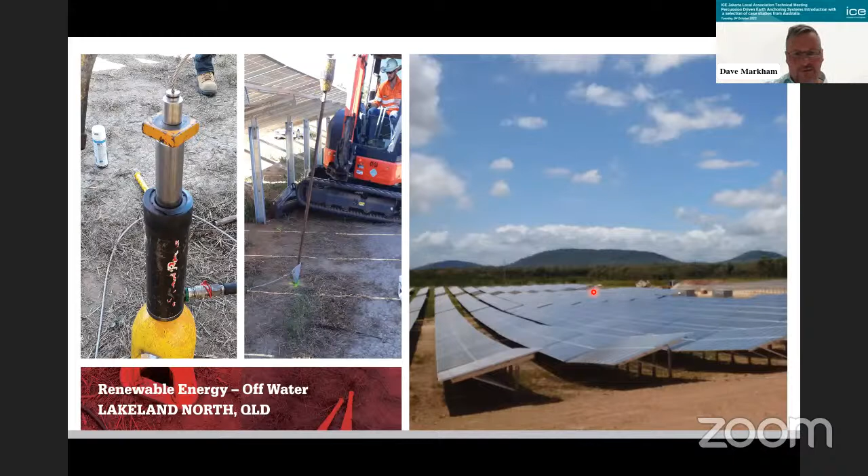So it's a bit like a horizontal wick drain. If you have any experience with vertical wick drains and foundations, relieving pore water pressures, this is just a horizontal version of it. Quite often when you're detailing this type of system, the ground is quite saturated and quite soft anyway, so these actually do go in quite easily when specified and adopted.

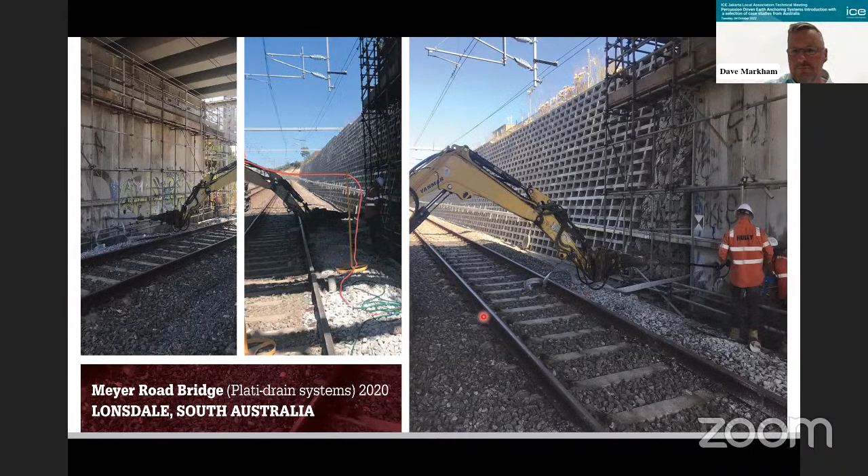Okay, so that's effectively the end of my presentation. I'm going to give you a very brief summary of the key benefits of this system. It is a simple and effective concept, but it's not always going to be the answer to your engineering problems. As I mentioned earlier, they're not rock anchors. Whilst you can get them into some pretty hard materials, I've certainly got them into weathered mudstones before, they're not a rock anchor, so it's got to be displaceable soils. So they're lightweight, fast and easy to install, and very importantly, they offer that immediate load verification.

Typical holding capacities, ultimate loads, maybe 20 tons. So quite a reasonable loading range to solve your engineering problems with. Can be used for temporary and permanent works, and there's no mess, maybe environmental benefit as well. Imagine if you were putting an anchoring or nailing system adjacent to a watercourse, and you don't want to contaminate that watercourse. This is a dry system, so you're not going to get messy grouts potentially getting into a river or watercourse situation. So arguably a low environmental impact solution.

Thank you very much for listening. I hope you enjoyed my presentation.

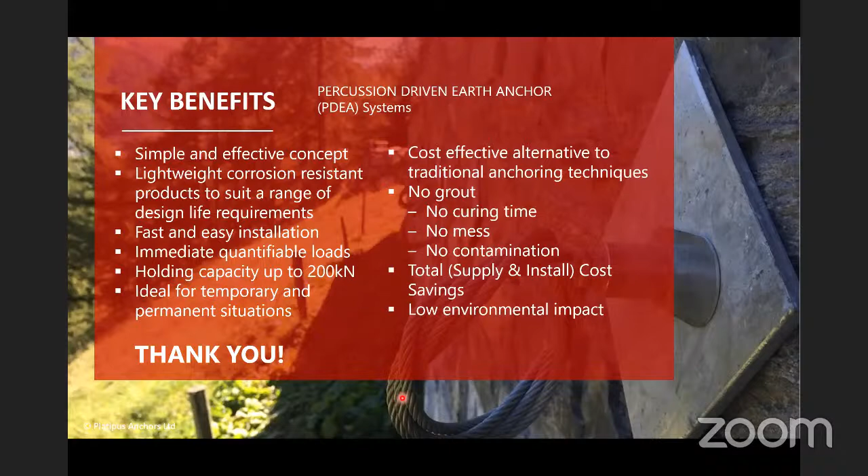Okay, thanks very much for those responses, Dave. I mean, the liquefaction question is certainly interesting. Of course, we had the terrible earthquake that affected Palu a few years ago, and the liquefaction was horrific. To be honest, I don't think there are many things that could have resisted what happened there. No, but it's certainly an interesting thought. I think we have another question on Q&A, which Ching Sheng Chen says thanks. There you are, there's a very nice message for you there, Dave. Thanks very much from Ching. So that's nice to hear.

My pleasure. And actually, I just have one more little question on my own list, which I was slightly curious about, a technical issue. So when you tension the anchor after you've driven it in, you take out the driving rod, then you get hold of the cable and pull. I'm just wondering, typically, how much distance is involved in that tensioning? How much are you moving things? Good question, right? Tried to explain it a little bit in my presentation, but it's a good rule of thumb.

Certainly, we're trying to understand the load-locking procedure - in other words, that anchor flipping over into the soil and then starting to take the load. That's where you're going to get most of your extension, most of your tension. Now there is a pretty good rule of thumb, which I'd say is 95% of the time pretty accurate, and that is in cohesive soils, which are softer, it will take somewhere between 1 to 3 anchor lengths to turn in the soil - that initial extension. So if your anchor is 100 mil long, if it's a cohesive soil, you're more likely to take 2 to 3 times, so that's 200 to 300 mil extension before you then start to take load. Then you don't get so much extension anymore. With friction soils, that's less.